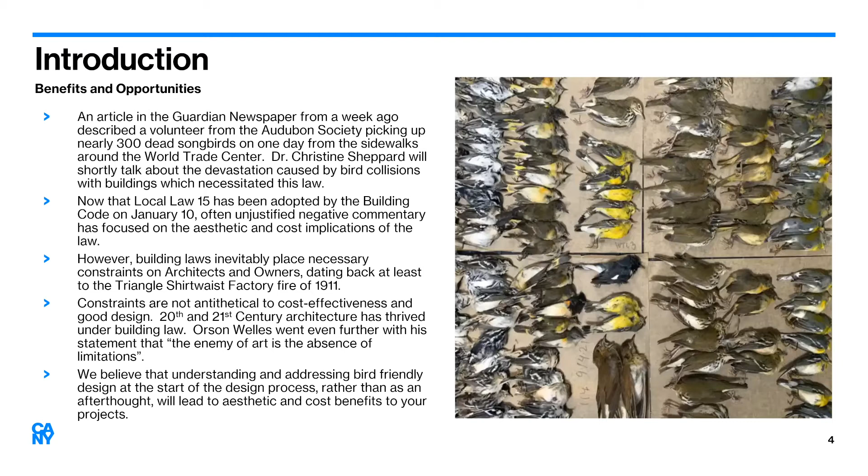So we believe here at CANY that understanding and addressing bird-friendly design at the start of the design process, rather than as an afterthought, will lead to aesthetic and cost benefits to your projects. So now we're going to look at the origin of the law, and I'll hand the presentation over to Dr. Christine Sheppard from the American Bird Conservancy.

Can you all hear me? I'm sorry, I thought I had disappeared for a minute.

I'm Chris Sheppard from American Bird Conservancy, and you won't be surprised to hear that the story I'm going to tell you starts with birds. I know that normally in your professional lives, when you encounter birds, it's usually pigeons or starlings or house sparrows, or maybe occasionally Canada geese and gulls. But the kind of bird that we're talking about now is songbirds, warblers, thrushes, sparrows, what I refer to as real birds, not nuisance birds.

Obviously, birds have value in themselves. They have tremendous economic value that in general we don't know about. When California burns to the ground, birds will bring seeds back in so that plants can regenerate. Birds make a tremendous contribution to agriculture. They eat insects that can destroy crops, that can destroy trees, that can give you things like West Nile virus. So birds are much more important to us than we normally recognize.

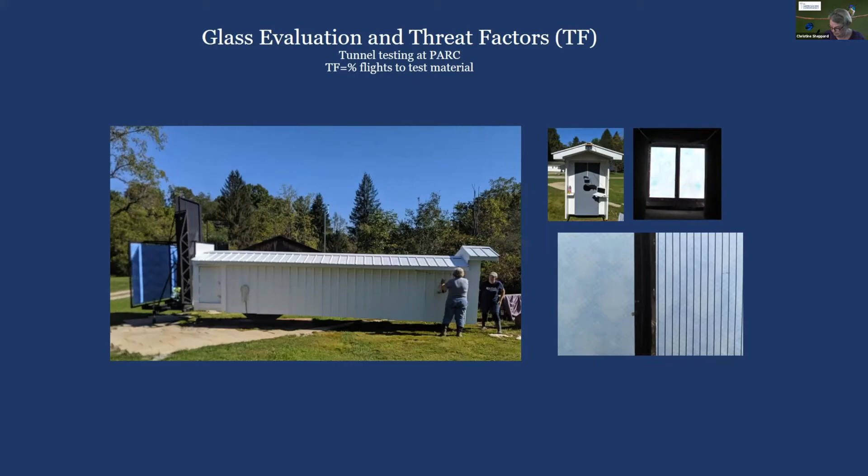Virtually any piece of glass in any environment can be a hazard for a bird, which I know is not what anybody really wants to know, but it's the truth. So we started investigating legislation as a way to get this information out.

I probably naively thought early on that if we knew how to solve the problem, people would just go ahead and do it. That's obviously not what happens. But one of the best ways to reach an awful lot of people, especially a lot of professionals around architecture, is to pass legislation. And in 2011, we helped San Francisco pass the first bird-friendly design law, their standards for

bird-safe buildings. Now, what I think is really telling is that in the subsequent 10 years, more than a dozen other communities in California have passed legislation, often slightly more stringent legislation. And what this says to me is that they're looking at San Francisco and they're seeing that they don't have to build ugly buildings. It's not costing an arm and a leg. They haven't had to hire a lot of new staff to implement the legislation. And in fact, the people in the planning department in San Francisco say that it really has not been an

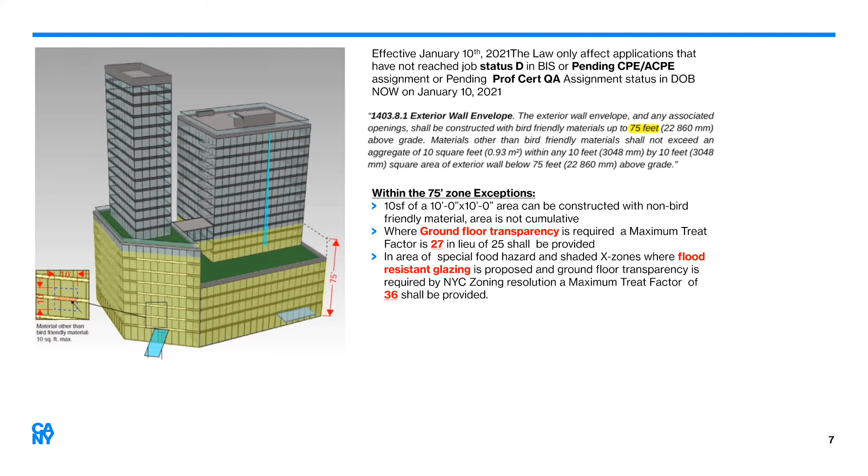The law also addresses the fly-through condition. A fly-through condition occurs when one or more panels of glass provide a clear line of sight through such element, creating the illusion of a void leading to the other side. Fly-through conditions exist in the following two circumstances: when the distance between parallel glass is 17 feet or less, and within 12 feet from a corner where there is a convergence of two glass sides creating a perpendicular, acute, or obtuse corner.

The requirements of the fly-through conditions are more stringent than the exterior wall envelope. When such conditions are created, the exceptions applicable to the 75 feet zone, such as the 10 square feet allowance, are no longer applicable. Structures adjacent to the facade that create a fly-through condition by juxtaposition are also governed by the stringent bird-friendly material requirement. For example, if a glass bus shelter is adjacent to the facade, thus creating a fly-through condition, it should be constructed using bird-friendly material.

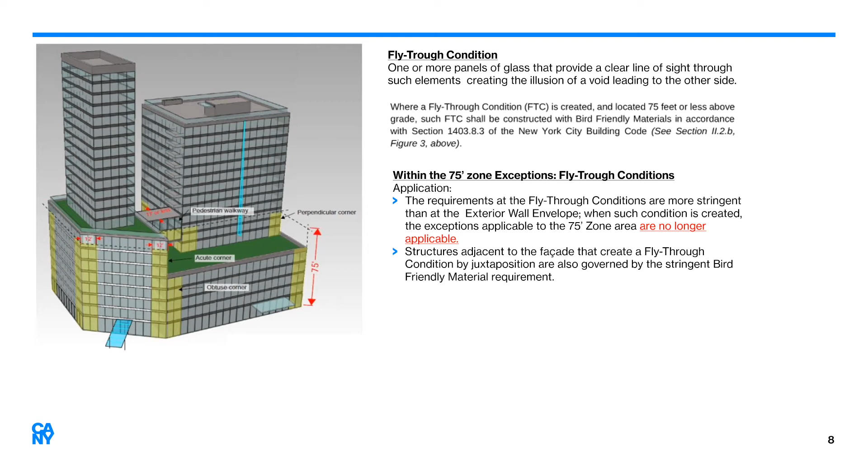A few additional conditions are affected by the law regardless of height, such as the green roof system or bird hazard installations. New exterior wall envelope and associated openings adjacent to a green roof system on the same building shall be constructed with bird-friendly material up to 12 feet above the walking surface. Bird hazard installations are defined as monolithic glazing installations that provide a clear line of sight on the exterior of the building, including but not limited to glass awnings, glass handrails and guards, glass windbreak panels, or glass acoustic barriers.

Finally, any see-through elements of the facade that protrude more than 10 inches from the face of the exterior wall envelope are required to be constructed of bird-friendly material regardless of height. When it comes to existing buildings, the law is applicable only when all glazing is being replaced. The law does not apply to alterations that do not replace all of the exterior glazing of the building, storefront replacement, or replacement of a portion of the exterior glazing within the building.

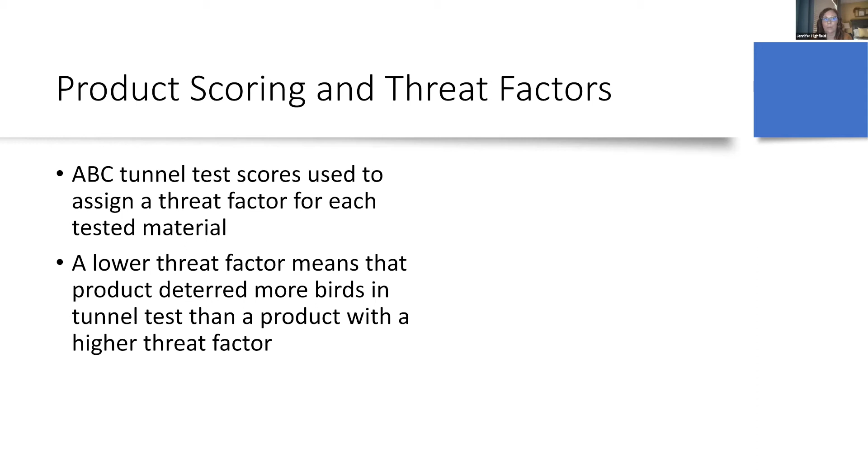We have 3 more additional patterns and colors that were tested with ABC. This includes 2 line patterns that are digitally printed with alternating white and translucent frit. The glass with the best performance was the dark gray, 1/8-inch lines alternating with 1/2-inch spaces. In the test, this pattern and color combination deterred 94% of the birds, which equates to the threat factor 6.

The other combinations dissuaded between 59% and 90% of birds. This means that all pattern and color combinations are more effective than non-printed glass. The takeaway from this testing is that lines do tend to perform better than dots, and more contrast tends to perform better than a tight, more dense pattern. Next slide.

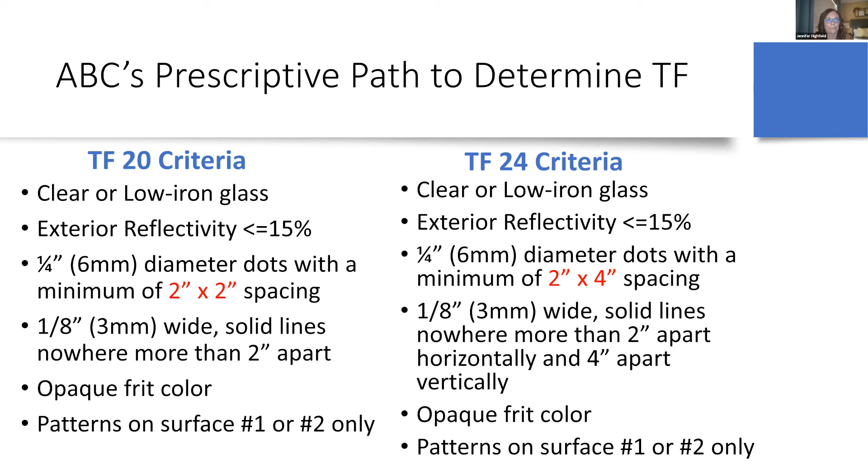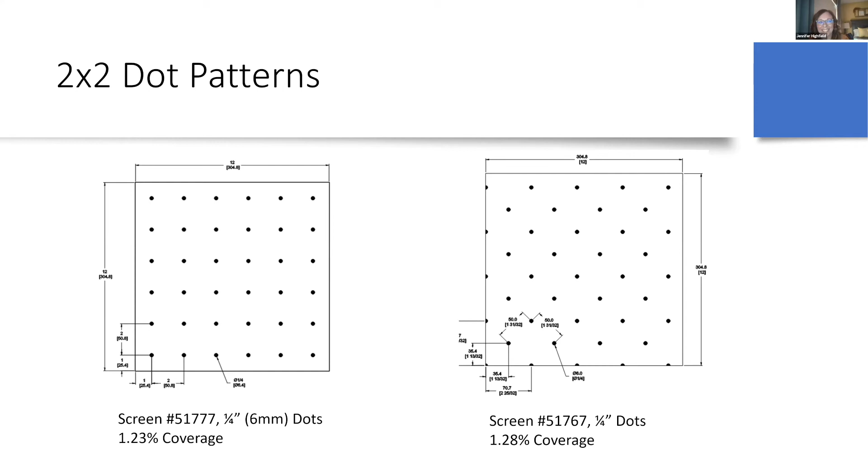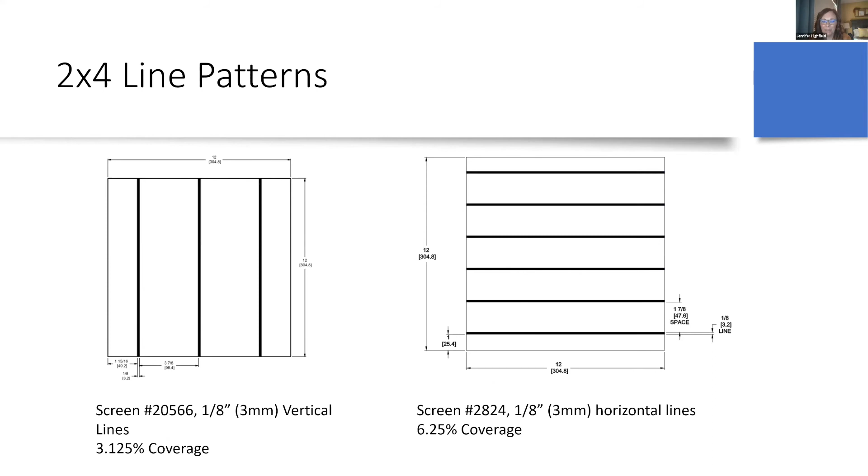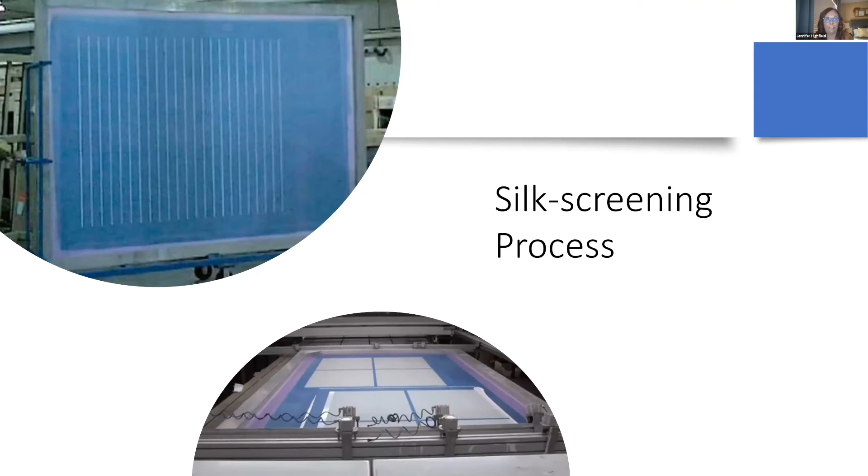Thank you. Viracon offers options to print on the glass done through 2 processes, silkscreen or digital print. Next slide. The silk screening process is very similar to screening a t-shirt. The large mesh screen is lowered above the glass and paint is squeegeed through the screen and applied to the glass. Then the fritted glass goes through the tempering furnace to become permanent to the glass. Next slide.

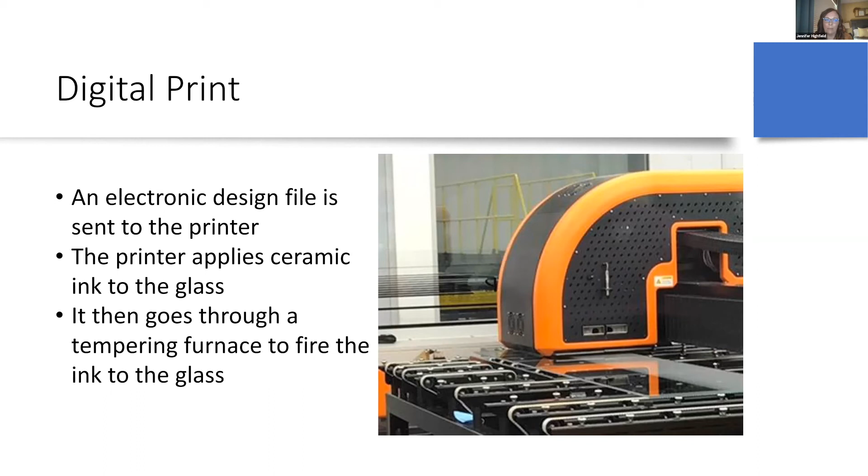An electronic file with the design is converted through specialized software and sent to a digital printer. The printer applies ceramic ink directly to the glass, which then goes through the same tempering furnace as silkscreen glass to bond the ink to the glass. Next slide.

Viracon can apply the frit, either silkscreen or digital print, to the number 2 surface along with the low-E coating. This will provide the best solar performance, specifically the solar heat gain coefficient, which is much improved over applying the frit to the number 3 surface. So for solar performance and bird safe glass, the number 2 surface is the best option, as you can see with this performance data. Next slide.

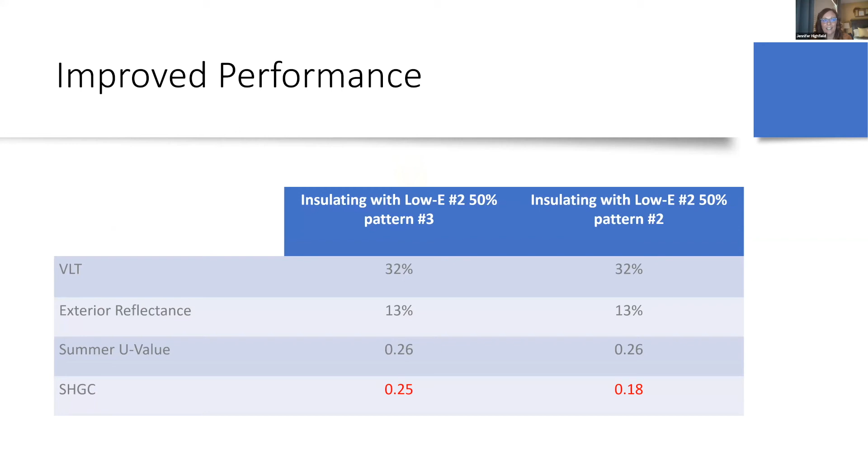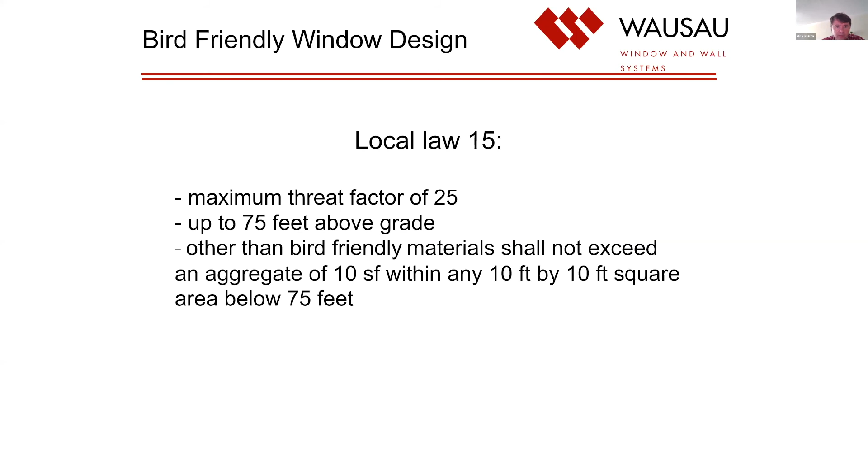So how does that impact window design, sourcing, timeline and pricing? When we are selecting glass, we keep in mind how it will impact the aesthetics and functionality of the window, storefront, and curtain wall, and the overall design of the building. Window sizes, acoustical performance, and energy efficiency are the most critical factors in selecting a window system for a particular design. Cost and timelines are also major factors for selecting the window and glass for a particular building. Next slide.

So here are a few different ways bird friendly glass is usually made. UV stripe coating; actually the most common bird friendly right now would be ceramic coating or silicone frit. Then we would have UV patterns. Acid etching is also really popular. They are all applied on different surfaces of the glass, depending on the manufacturer and the IGU. Each of those has advantages and trade-offs for effectiveness and aesthetics,

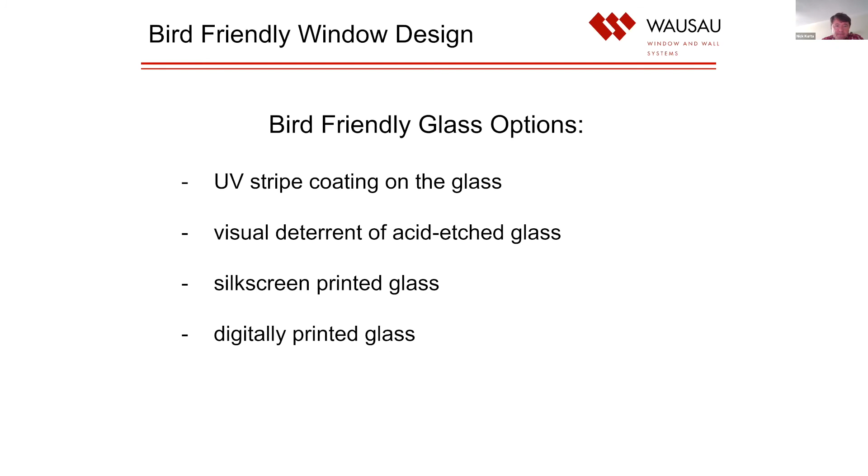So sometimes one option would not be available with another option, and vice versa. Next slide.

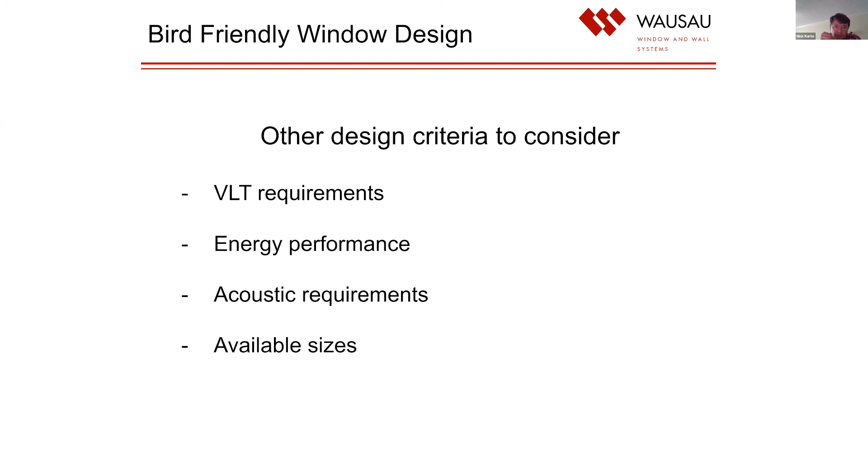So for example, energy performance and visible light transmission. With the most common option of ceramic and silicone frit, they will reduce visible light transmission to the inside, and they are highly visible to humans, but also visible for the birds. UV patterns are less obstructive to the view than frits, but slightly less effective at deterring bird collision. Acid etching is more durable and may be combined with low-E coating on the same surface.

So if you consider the most common low-E coating on surface 2, and look into two samples on the screen. One is for UV coating, which is presented as a coating on laminated glass. So the coating is actually between the two glass, and it's basically a laminated coating. With the acid etch, it's usually on surface number 1. The same can happen with a frit. It also can be on surface number 1. But with Viracon, it's available also on number 2.

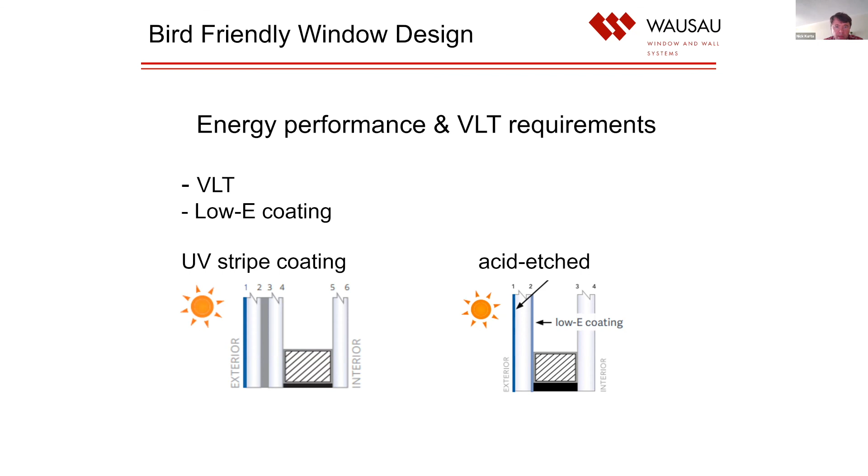The same can be said about acoustic requirements. For the acoustic requirements, we consider different IGU makeups, and it could be the standard with the same thickness of the glass, or different thicknesses of the glass, or a combination of laminated and tempered glass. What that can affect, again, with the different manufacturers, they can offer their bird-friendly coating only on certain thicknesses of the glass, and they cannot offer it with other thicknesses.

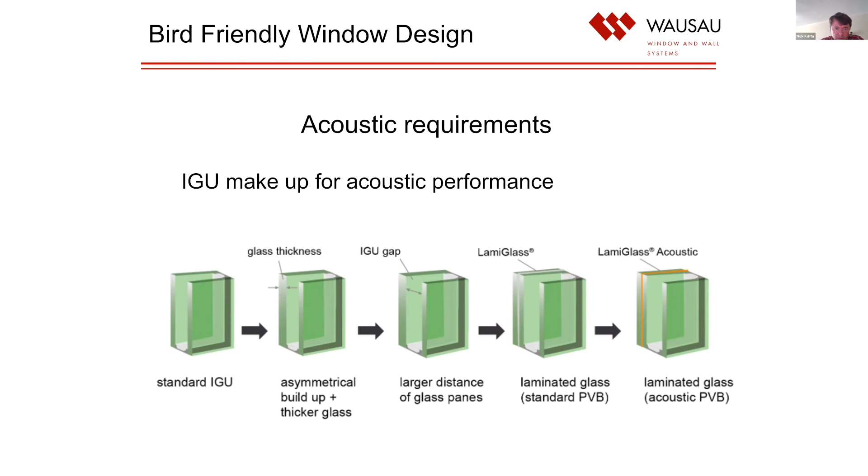So with acoustic requirements, usually you have a combination of the IGU that will provide you with a specific OITC that would be supported by test reports. And if that cannot be achieved, we need to play around and see what is available and if we can reach the required OITC. Next slide.

With the sizes, size limitations would vary from each manufacturer and would also be dependent on pattern specifics. Each type of coating may also have different size limitations. The UV option, the one that I presented before on a picture with the laminated option, will basically increase the glass weight and will limit size for the operable window.

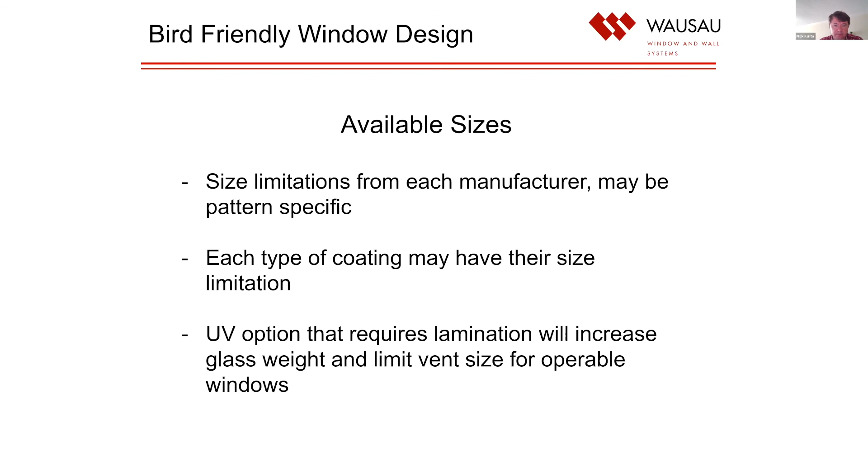I had a situation in a project recently where, as any project in New York City, they usually go oversized and everybody would like to have a full height window and huge vents. And they selected glass that actually has a UV coating, which is in between the glass. And that glass is available only in 1 and 5/16" IG, which is a laminated combination. It's really heavy. So now we have a challenge to actually offer the sizes that they are requesting, and in the bidding stage, we need to come up with a solution for how we can make it. Next slide.

So when we consider window design, we need to consider all performance requirements, not just one, like an energy requirement or, let's say, a bird safety requirement. Sourcing always has a few options. With time limits and pricing, I would really expect extended lead time and of course additional cost with bird-friendly glass.

So collaboration with an experienced fenestration manufacturer can add value, save you time and expense, and present many available options from the beginning of the design stage. We usually work closely with building owners, consultants, and architects to select fenestration and other glass elements that will fit the budget for the project, while meeting the design vision and applicable building and energy code requirements. As a window manufacturer, we work broadly with different glass suppliers that can offer different options, and based on that, we usually try to select the best one that will suit the particular project.